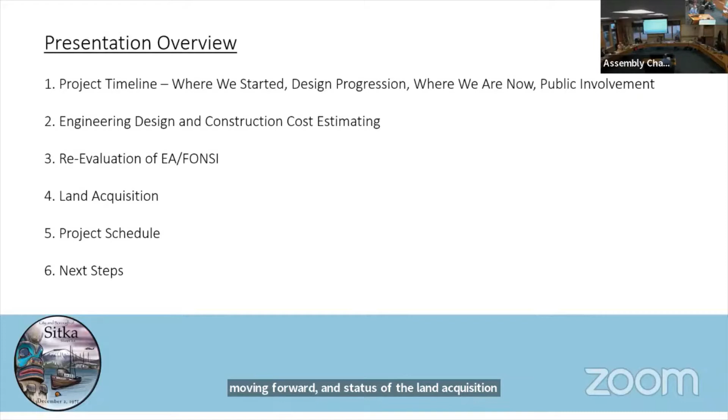So, project overview: I'm going to go over the timeline, the current engineering design at 35%, some nuances going on with the environmental process, our steps moving forward, status of the land acquisition, overall project schedule, and next steps moving forward.

This project, many of you probably know, has been going on for over 20 years now, but I always like to go back through and talk a little history. Even after 20 years, we get comments like 'where did this project come from, haven't heard about it.' So any opportunity I can take to repeat some of these steps that have gone on, I will. We've done several master plans, studied this up and down the road system, and narrowed in on the channel as a key area we wanted this facility to be at as a community.

And then we honed that in closer to the location that we're at today. We've got stakeholder groups, we've had this as a legislative priority, we have state support for the upland property purchase through them, and we've had the assembly adopt it as a high priority project over the years.

We most recently adopted a resolution about a year ago, in 2021, really solidifying the location and moving forward into the design phase of the project, which was a large commitment on the FAA funding side. Once you do that, you're committing to build some sort of project, or you're at risk of needing to pay back any funds we've spent in those phases.

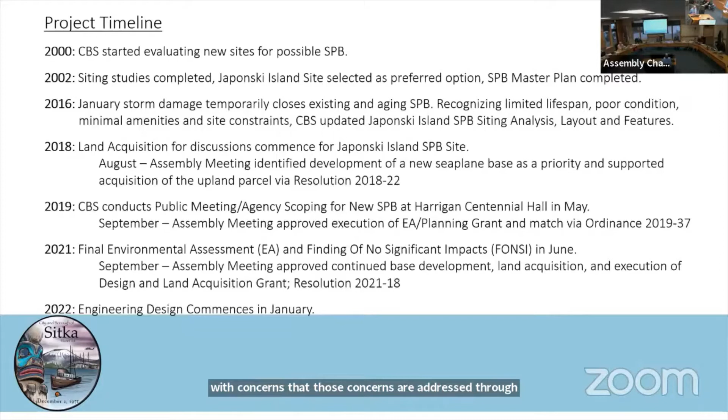20 some years later, do we have any opposition or concerns for this project? Absolutely. If you recall a year ago when we had that resolution, we had presentations from different bodies with concerns. Those concerns are addressed through the environmental process under the federal project guidelines, so that continues to be addressed, and I'll talk about that a little more in future slides.

But the environmental process, big picture, is supposed to look at, based on the scope of the project, is it right sized? Is it in the right location? Is there any major red flags that would say it shouldn't move forward? Then next steps, if it can move forward, are there any impacts that should be mitigated? That has been gone through, and we got the highest level of approval, a finding of no significant impact. That means yes, it's an appropriate location, appropriate scope, and there isn't any major mitigation that has to happen as a result of the project.

That happened back in June, I believe, of 2021, that we got that status.

Some concerns moving forward outside of that will be addressed through things like partnerships, for example with STA, to have them involved on the archaeological findings that we may discover during construction. So we'll work on setting up an agreement with them if they'd like to be on site and involved in that. So we're also working on steps in those regards.

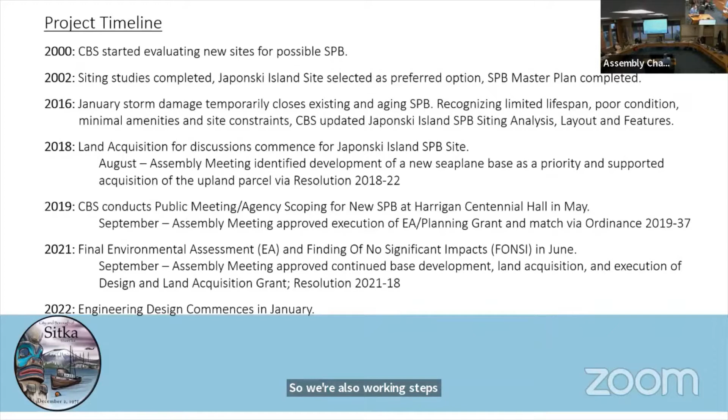The existing seaplane base is woefully undersized for the needs projected in the business case studies that have been done. I think you're aware it's at the end of its functional life. We've done some emergency repairs to keep it afloat, but even those repairs will soon be coming to the end of their design life.

The location's not ideal for any type of expansion that meets future needs. There are conflicts in the channel at this location, among other things. So that's why we're here today, why we're looking at a new facility to meet future projections, and why we're looking at a different location.

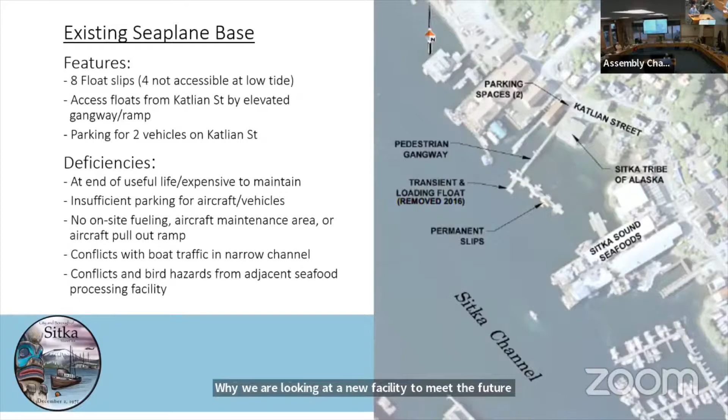When we last left this in September 2021, we passed the resolution adopting this location and general concept scope of project. This drawing just depicts what we presented a year ago for that resolution.

Basically what you're looking at here, everything in these contoured dark lines is your water infrastructure.

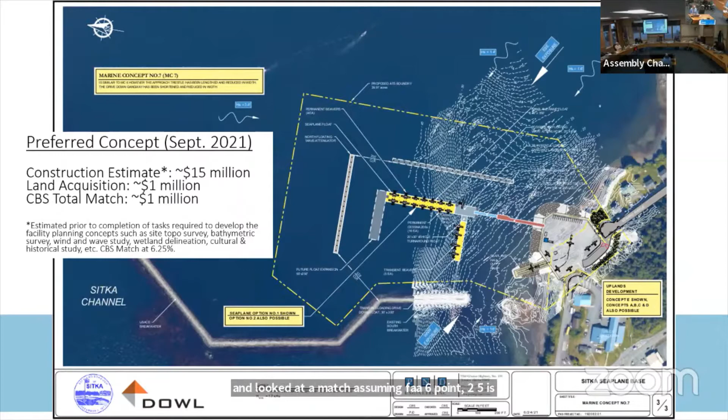Now moving forward, we've brought on all the designers and detailed out everything about the scope of this project. We've brought seaplane base users in to give us ideas of what they like and don't like to improve it. And we've brought in, at this stage, a professional cost estimator that's required by FAA to make sure we're getting the cost right.

Through that process, you can see right away on this slide, now we're sitting at a construction estimate of $34 million, which puts a CBS match at over $2 million. So the CBS match is doubling as we refine this design.

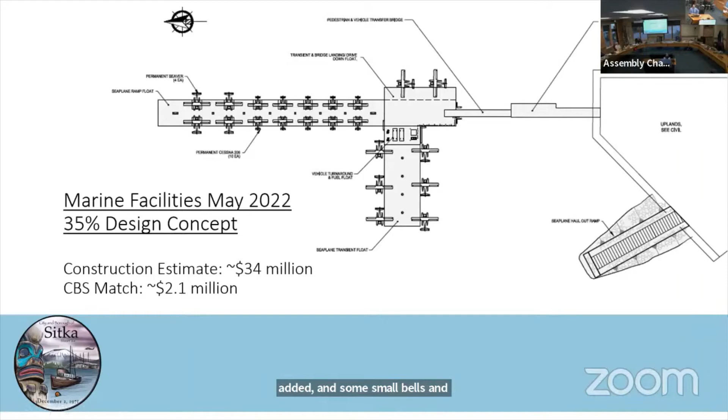Looking at this, it better depicts the water side, pretty similar scope to what we presented a year ago, a little bit of expansion of more transient that we added, and some small bells and whistles. We've also taken some things away. So all in all, the scope's not much different.

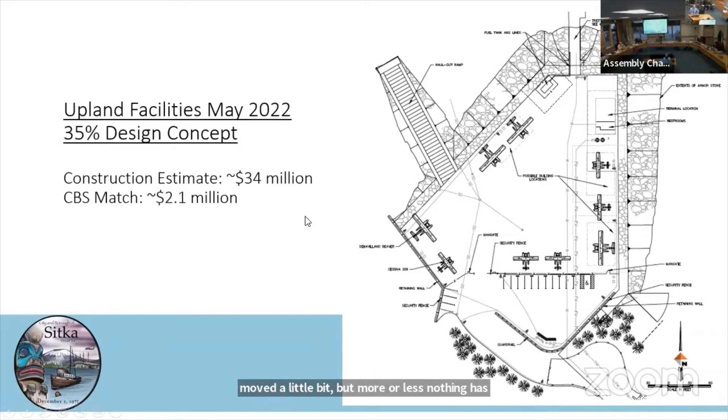This details out the uplands. You can see it's pretty similar. You have a ramp to pull out the planes. Parking areas moved a little bit, but more or less nothing has significantly changed from when the scope was approved.

Looking at a year ago to today, what's going on with the cost, and we've analyzed that quite a bit. There is some increased scope to the longer permanent slip floats, larger transient float area. We increased it by 3 slips, and you have a little bit more extended area for vehicle turnaround and putting the fuel down on the dock.

Those all have some increased cost to them. We have a little bit of increase to the uplands for the wants and wishes to have better facilities for commercial use when passengers come to get out of the weather.

But the real significant change that we are seeing in the cost is a little bit twofold, more minorly so, is inaccuracies that you will get not having a professional cost estimator, not having the design engineers detailing everything out, but more so is inflation's just unprecedented.

What we're seeing, I saw that in my presentation last assembly meeting with the airport project. We're seeing it on all our projects. It's like nothing I've seen before.

I mean, I watched the Blue Lake Dam from the outside, and that wasn't inflationary. I think that was more of an accuracy issue that you will see from an early concept and carrying that cost through too long and not adjusting it.

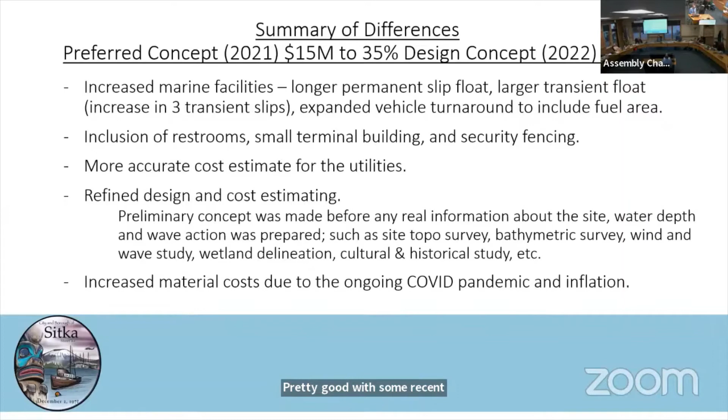So this will go up a little bit, but I don't think it's too significant. So it gives you a high level approximation of where we sit today with the current design. We recognize that we always feel a duty to try and design and show options that fit within the original intended budget. So we would like to come back and do that with this body in the very near future. We can see high level, and that's the biggest cost increase I've seen in my career.

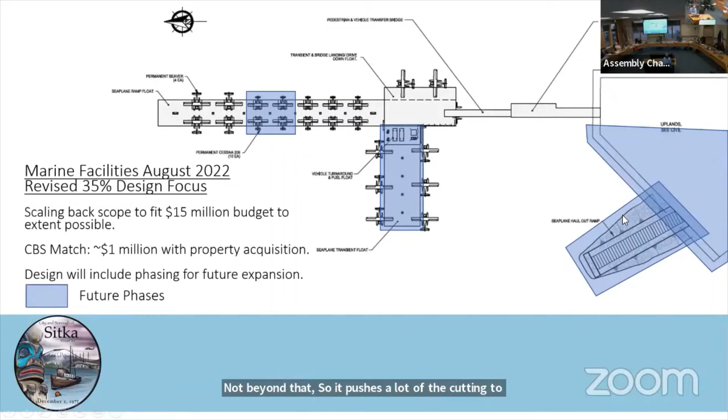So on the water side, you would see us cutting out basically all the ability to pull out planes and park them, and we would stick with, we need to reconfigure this a little bit. If you're only doing parking and access to the float basically in your uplands, we will simplify this more when we bring it back to you, of a more simplistic parking and access, to get this down within the $15 million construction.

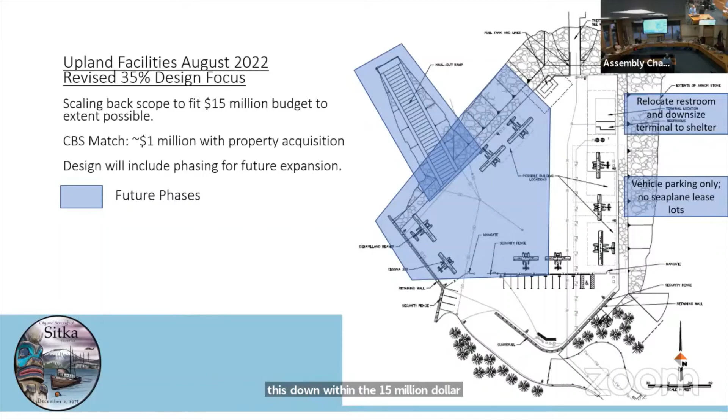So the other piece I wanted to touch on is the environmental process. I'd mentioned that we had gotten the finding of no significant impact about a year ago. That has now been revisited through the concerns and requests the FAA has received, one of which STA has requested the seaplane base to be relocated. So they did a full audit review of that environmental process, and they feel they need to circle back on

some items on that. I'm not getting the sense there's any major red flags that would change that ultimate finding. There may be some mitigation added, but the main thing is it now pushes our project out yet another year. So now we're looking at a 2025 construction completion period, when we were at 2023. Then they pushed us to 2024, and now they're pushing us to 2025. So we keep getting pushed out in the process.

What we're trying to do on our side is make sure we are not the delay moving forward in this process. One of the key things we have to focus on is moving forward with the land acquisition piece. We have an agreement with the state of Alaska to do that by December 31st. So we come back with these more detailed options to shrink the scope to a $15 million budget and look at if we want to do that. We also want to solidify a match or a funding appropriation enough to move forward with the land acquisition, so we can hit this deadline and not delay the project and not open up that land acquisition to renegotiation.

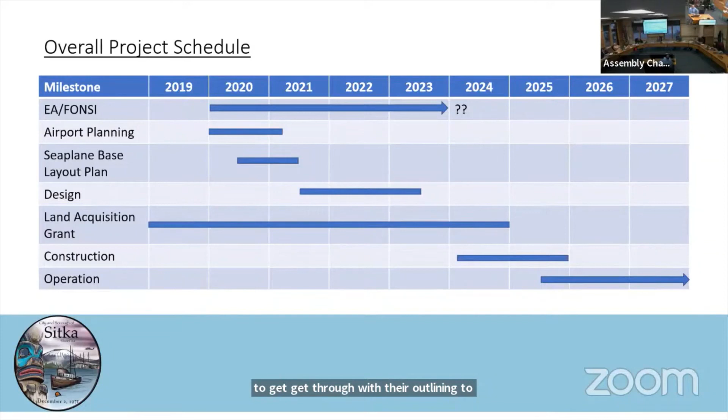Again, looking at the schedule real quick, it's pushing us out to construction completion of 2025. The environmental steps are a little bit unknown right now. They are telling us that's approximately a year longer to get through what they're outlining to us, and they'll get us those details. I might possibly have more information on that by our next presentation.

So again, next steps to bring back right sizing the project, comfort with what match we're dedicating to the project, and address the property acquisition. And then from there, we'll move on with the environmental and continue to pursue the grants and get those secured, which that side looks real optimistic other than we will not see 0% any longer from what I see, but we made it with the 0% for the design phase, meeting that September 30th deadline last year. So that did save us a good chunk of money on the project on that phase.

That's all I have tonight. If there's any questions, I'm available.